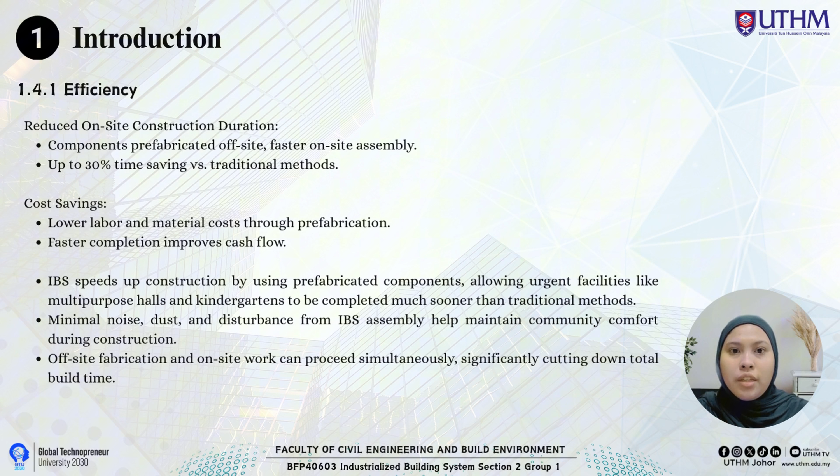The next part is community needs. First, IBS speeds up construction by using prefabricated components, allowing urgent facilities like the multipurpose hall and kindergarten to be completed much sooner than traditional methods. Minimal noise, dust and disturbance from IBS assembly help maintain community comfort during construction. Lastly, off-site fabrication and on-site work can proceed simultaneously, significantly cutting down total build time.

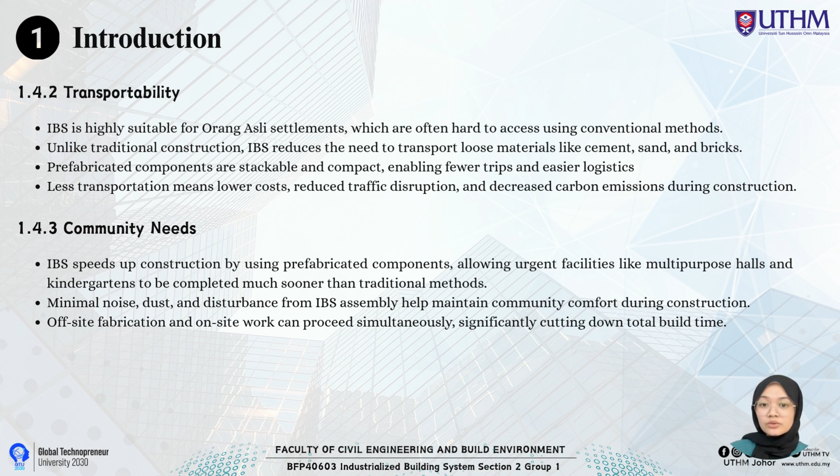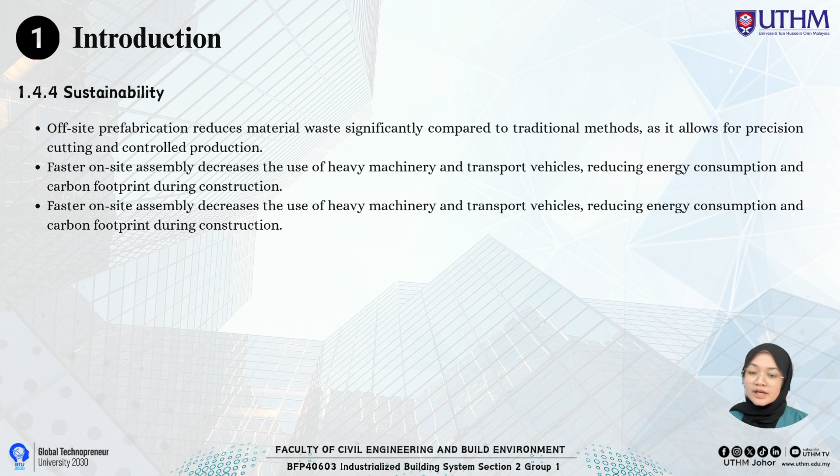Next is sustainability. Off-site prefabrication reduces material waste significantly compared to traditional methods, as it allows for precision cutting and controlled production. Faster on-site assembly decreases the use of heavy machinery and transport vehicles, reducing energy consumption and carbon footprint during construction. Hi, my name is Elvin.

Next will be the 2D layout drawing, which is a site layout plan. You can see that the site location is at Kampung Orang Asli Pos Legap, Sungai Siput, Perak.

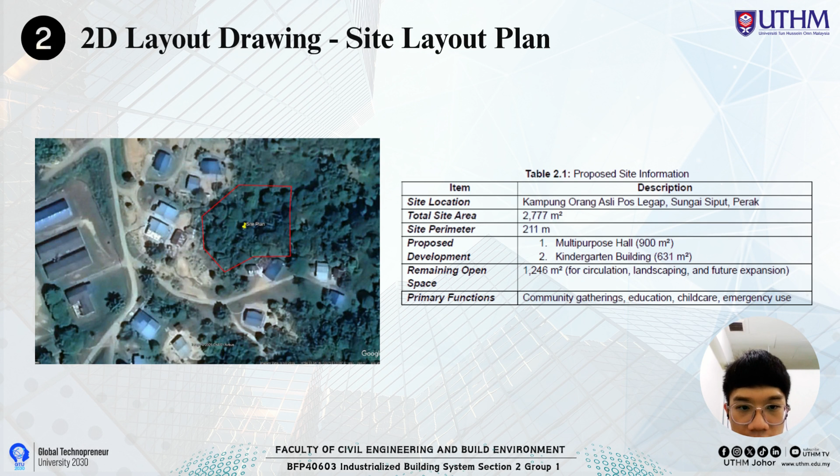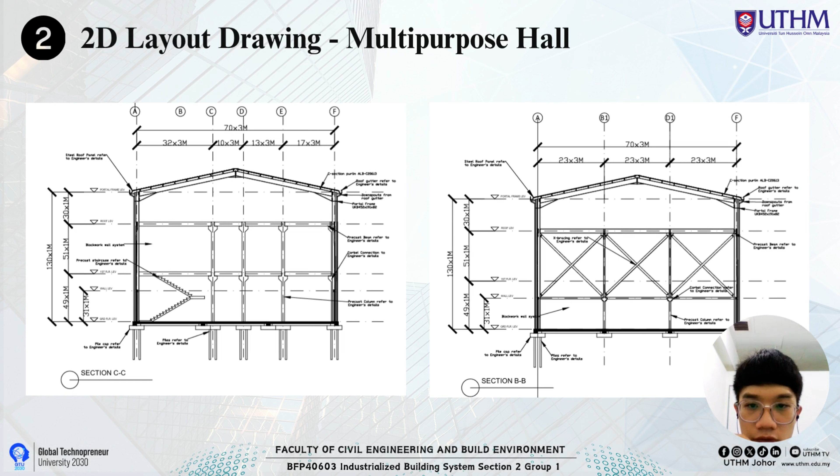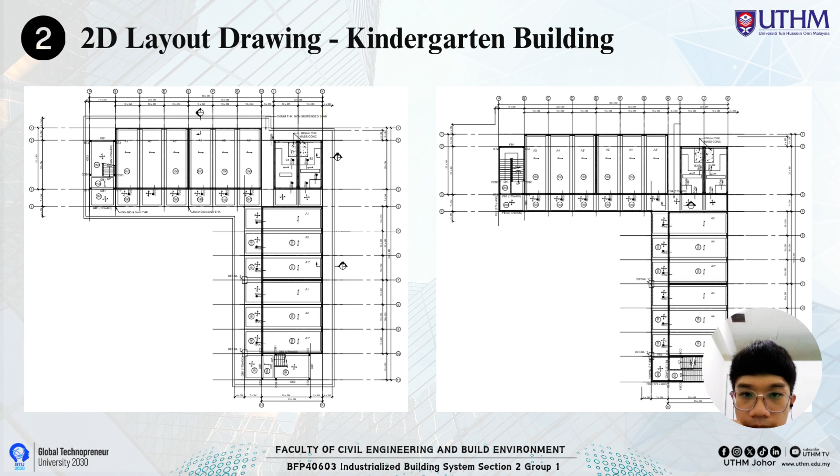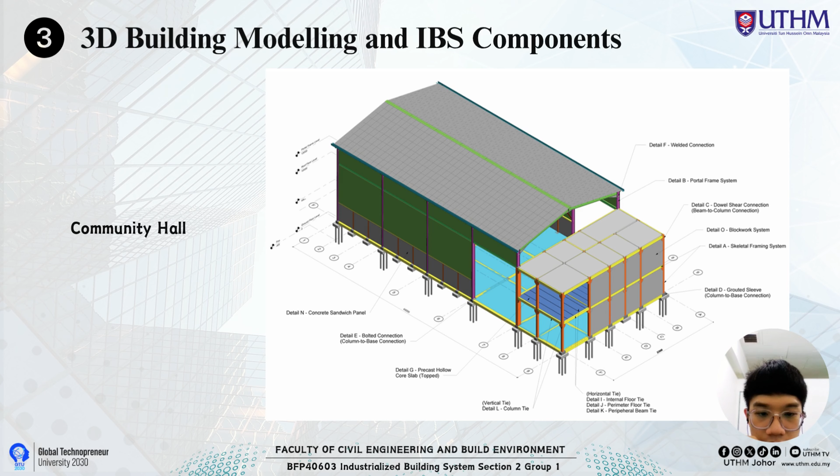So for the IBS component, firstly will be the frame system. Detail A is the skeletal frame system. This system comprises modular components such as precast columns, beams, staircases, and walls. This is applicable to both the multipurpose hall and kindergarten buildings.

For detail B is the portal frame system. This system utilizes large precast and steel assembled columns and rafters rigidly connected to form a moment resisting joint capable of spanning wide distances without intermediary support. This is applicable to the multipurpose hall.

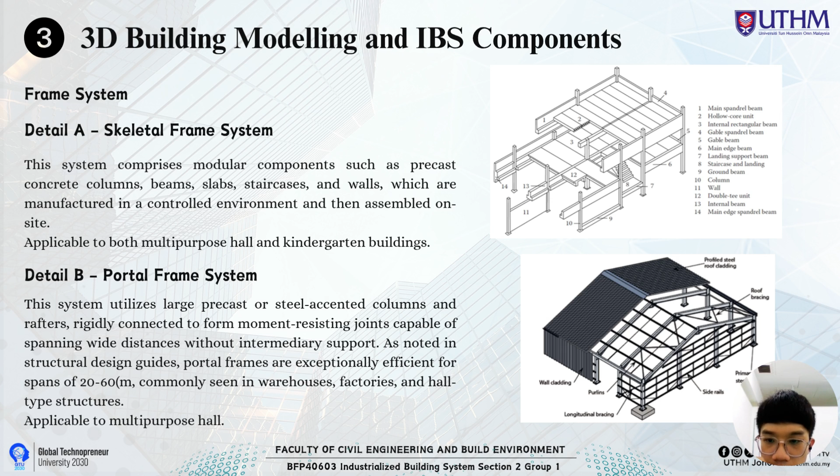Now I will explain about the connection system. The first one is detail C, which is dowel shear connection, beam to column. This detail efficiently transfers vertical and horizontal load between precast components. The components are: first, threaded steel bar, transfers shear force horizontally. Second, corbel, acts as a short cantilever to support vertical loads.

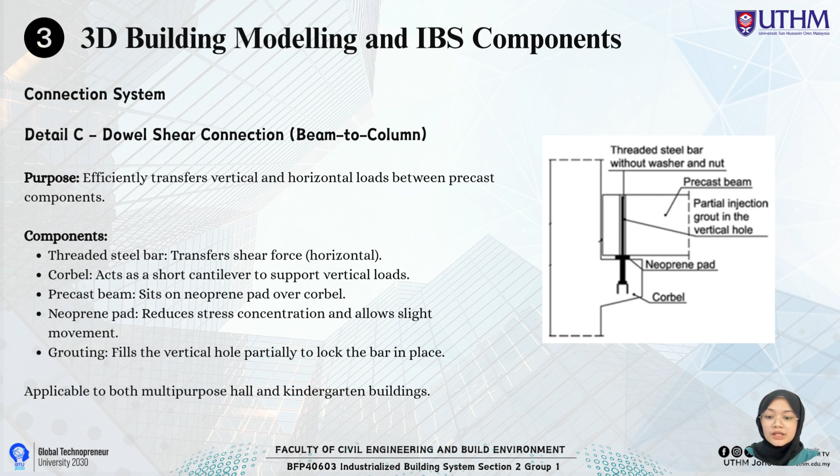Third is precast beam, sits on neoprene pad over corbel. Fourth is neoprene pad, reduces stress concentration and allows slight movement. Last is grouting, fills the vertical hole partially to lock the bar in place. This detail is applicable to both the multipurpose hall and kindergarten building. Second, for the connection system, is detail D, which is grouted sleeve column to base.

The key concept is the first one, grouted sleeve: join precast columns by inserting rebar into a steel sleeve filled with high strength grout. The second one is load transfer: it efficiently handles axial, shear and bending forces. For the features shown in the figure, picture A is a schematic showing rebar inserted into the sleeve with grouting and overflow holes for complete bonding. Picture B is a site image, a real life view of the grouted sleeve connection during rebar installation. This detail is applicable to both the multipurpose hall and kindergarten buildings.

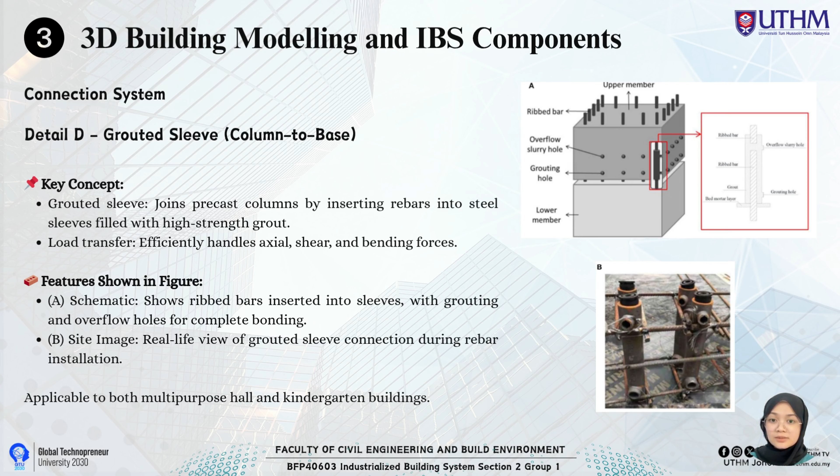Third one is detail E, which is the bolted connection, connecting column to base. The key features: the steel base plate is connected to the column end and anchored to the concrete foundation using bolts. It transfers axial load, shear force, and bending moment into the ground safely, and provides a rigid and stable support for vertical and lateral loads.

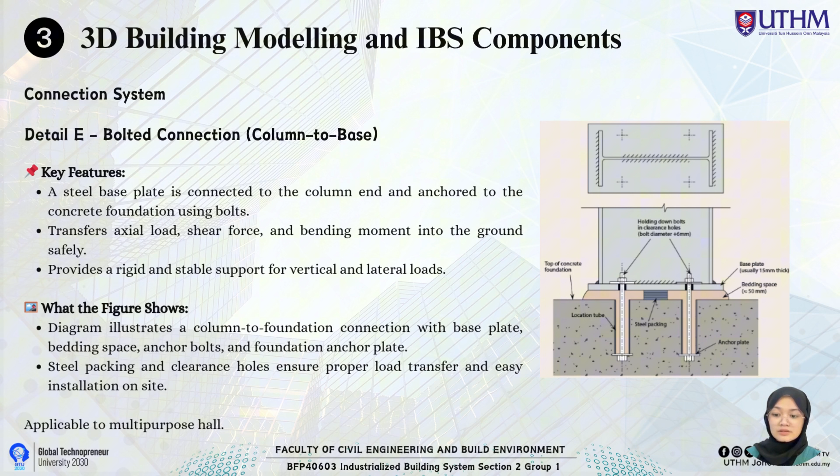The figure shows a diagram illustrating a column to foundation connection with base plate, bedding space, anchor bolts, and foundation anchor plate. Steel packing and clearance holes ensure proper load transfer and easy installation on site. This one is applicable to the multi-purpose hall.

The last one for the connection system is detail F, which is the welded connection, a general connection for steel. What is welding? A common method to join steel components by melting and fusing metals. Used in fabrication shops and on construction sites. It creates rigid monolithic joints with strong continuity. Application in construction: essential in steel building frameworks and bridge construction. It ensures high structural integrity and efficient load transfer. And last one, suitable for permanent connections that require strength and durability. This one is applicable to the multi-purpose hall.

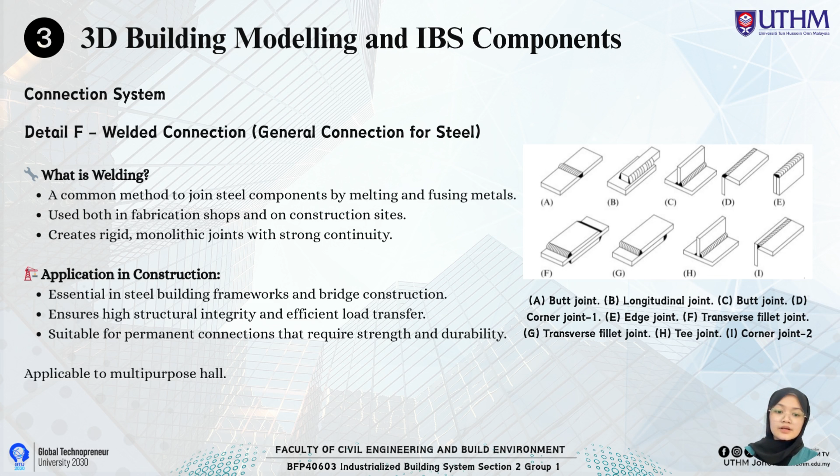For the picture, A is a butt joint, B is a longitudinal joint, C is a butt joint, D is corner joint 1, E is an edge joint, F is a transverse fillet joint, G is a transverse fillet joint, H is a tee joint, and the last one, I, is corner joint 2.

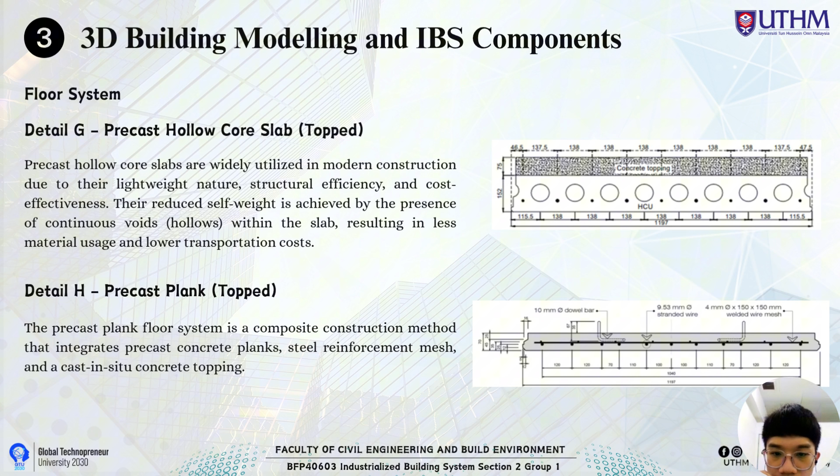So next will be the floor system. There are two types of slab that will be used in both the multipurpose hall and the kindergarten building. Detail G is the precast hollow core slab. These hollow core slabs are widely utilized in modern construction due to their lightweight nature, structural efficiency, and cost effectiveness. And detail H is the precast plank. The precast plank floor system is a composite construction method that integrates precast concrete planks, steel reinforcement mesh, and cast in situ concrete topping.

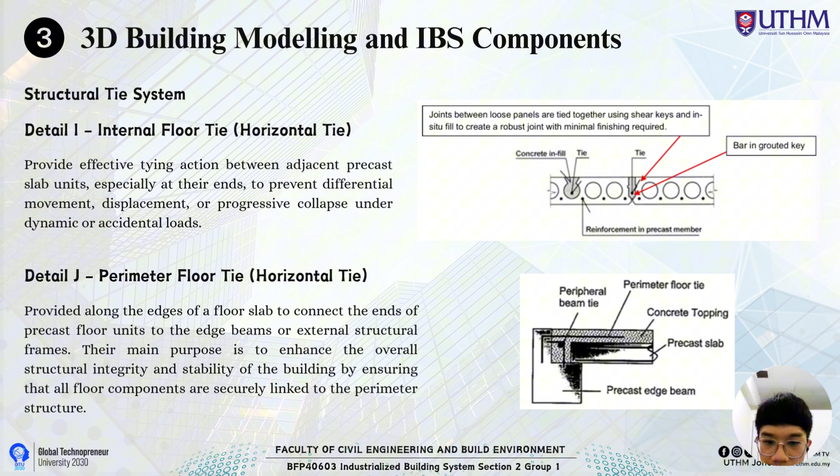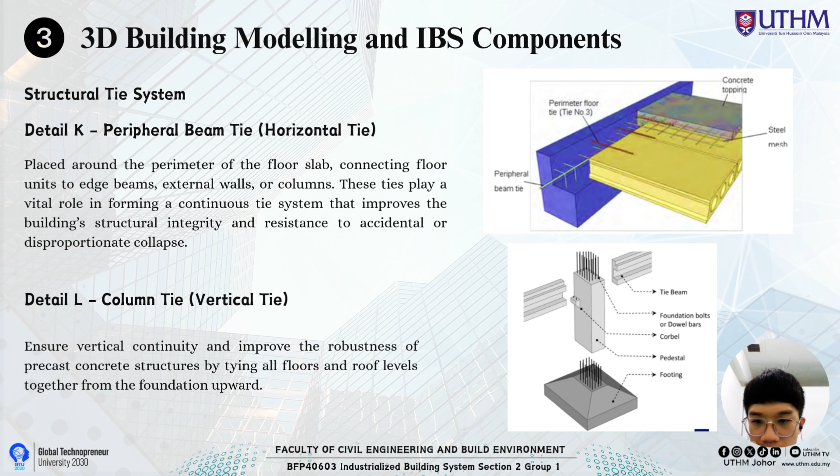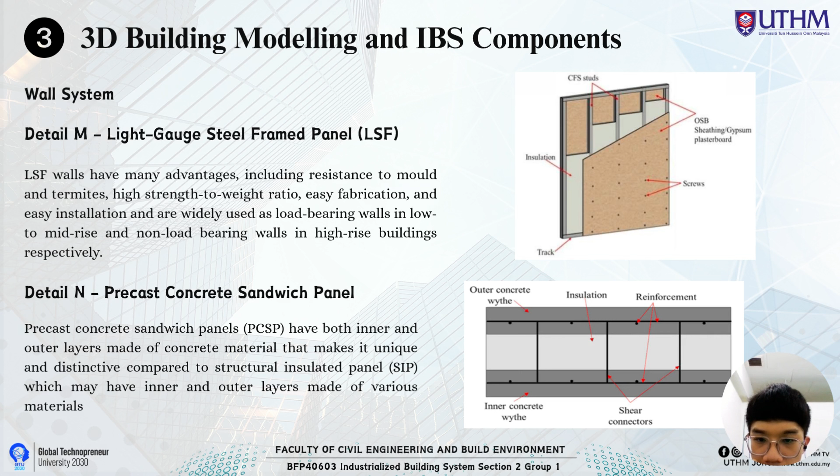These are the wall systems used. Detail M is the light gauge steel frame panel, LSF. It has many advantages, including resistance to mold and termites, high strength to weight ratio, easy fabrication, and easy installation. Detail N is the precast concrete sandwich panel. It has both inner and outer layers made of concrete, which makes it unique and distinctive compared to structural insulated panels. Detail O is the blockwork system. It's a versatile method of construction that involves the use of concrete blocks, clay blocks, and lightweight blocks.

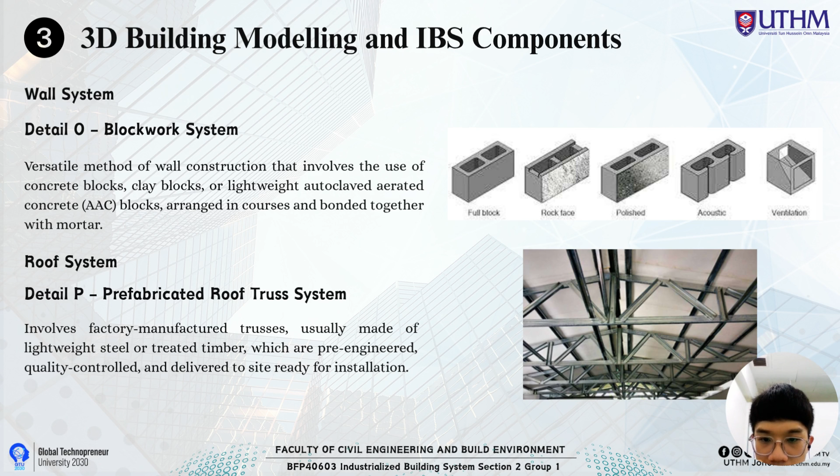Next will be the roof system. Lastly, detail P is the prefabricated roof truss system, which involves factory manufactured trusses, usually made of lightweight steel or treated timber, which are pre-engineered, quality controlled, and delivered to site ready for installation.

My name is Kobe Kwa. I will present Chapter 4, IBS score calculation. The IBS score consists of 3 parts: Part 1, structural system; Part 2, wall system; and Part 3, simplified construction solution. 4.1, IBS score of the multi-purpose hall. For the structural system, we use precast column, beam, and slab. We use cast in situ with reusable formwork for the slab near the staircase. For the roof, we use prefabricated steel. The total score for Part 1 is 48.78%.

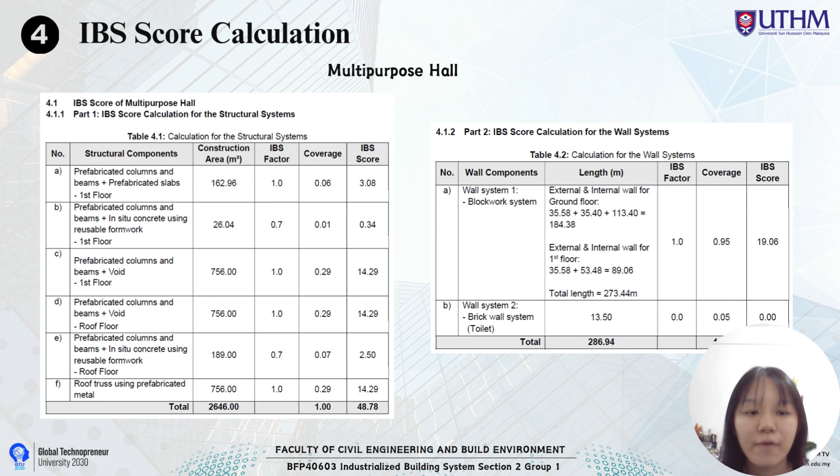For the wall system, we use the blockwork system for all walls except a brick wall system at the toilet, and the total score for Part 2 is 19.06. For Part 3, we select standardized components that are aligned with IBS requirements. Therefore, for this part we got the maximum score of 16 points.

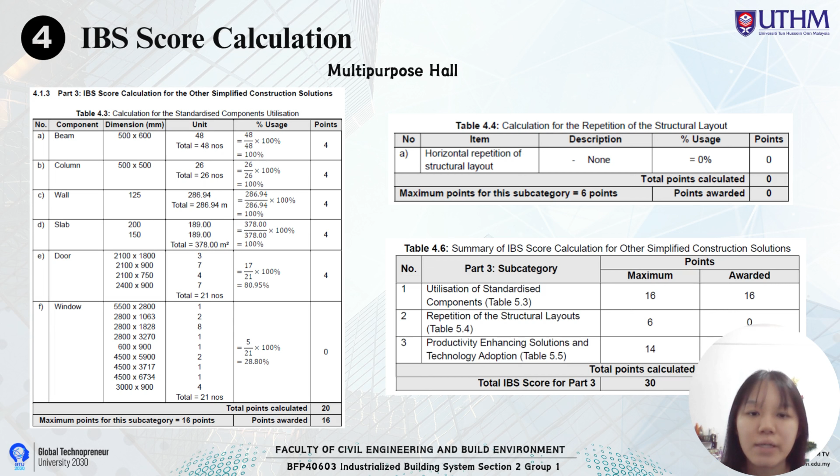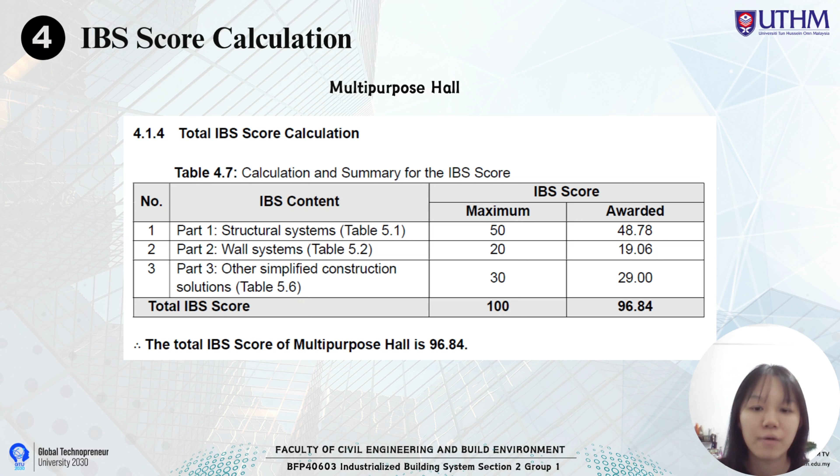The multi-purpose hall has no repetition horizontally or vertically. Hence, there is no score for repetition of structural layout. For productivity enhancing solution and technology adoption, the score recorded is 13 points. Total score for Part 3 is 29%. By summing up the Part 1, Part 2, and Part 3 scores for the multipurpose hall, the total IBS score for the multipurpose hall is 96.84%.

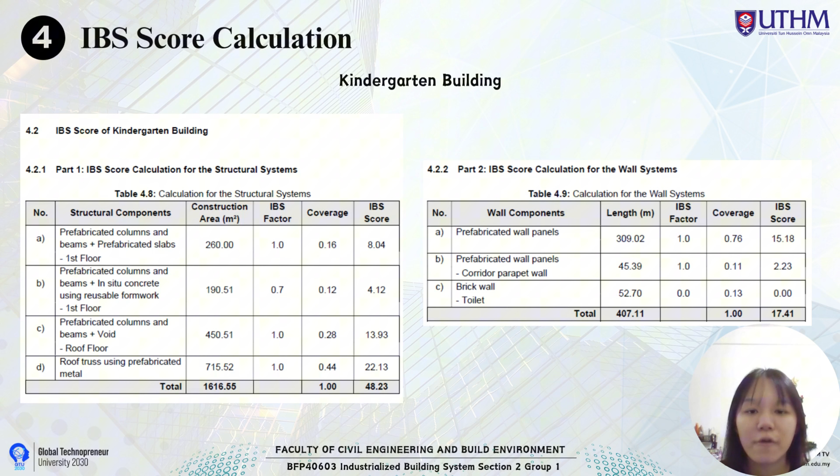4.2, IBS score of kindergarten building. For structural system, we use precast column, beam, and slab. For B, we use cast in situ using reusable formwork for the slab near the staircase. For roof, we use prefabricated steel. The total score of Part 1 is 48.23%. For wall system, we use prefabricated wall panels for all walls except brick wall system at the toilet. The total score of Part 2 is 17.41%.

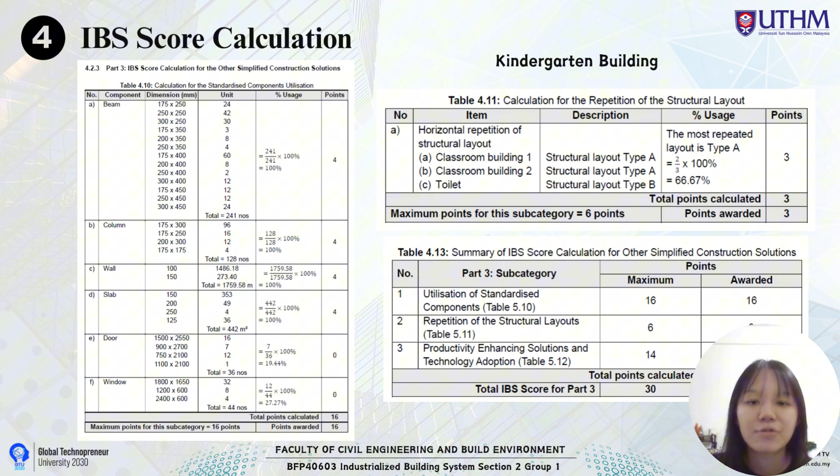For Part 3, standardized components utilization, the kindergarten building scores 16 points, and this building has horizontal repetition of structural layout, that is 66.67%, hence it has scored 3 points. For productivity enhancing solution and technology adoption, the score recorded is 14 points. The total score for Part 3 is 30%. By totalling up the scores recorded in Part 1, Part 2, and Part 3, the kindergarten building has a total IBS score of 95.64%.

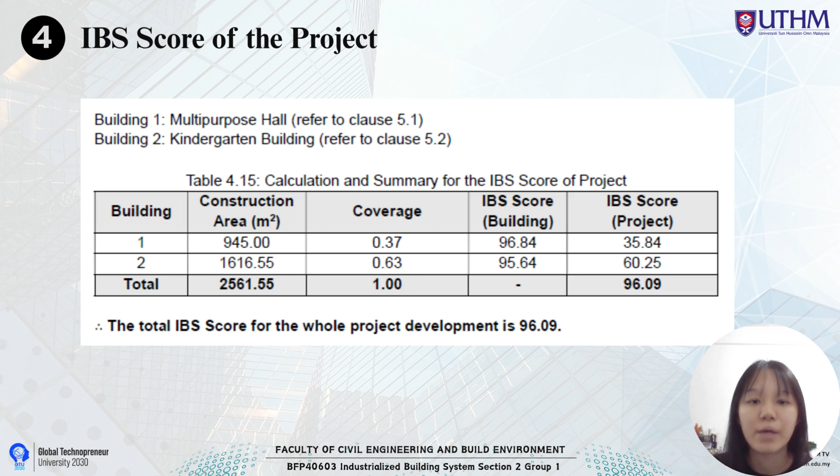IBS score of the project. The IBS score of the project is calculated based on the coverage and also the IBS score of each building. So for building 1, multi-purpose hall, the IBS score recorded is 35.84%, and for building 2, kindergarten building, 60.25%. Summing up these two values, we get the IBS score of the project, 96.09%.

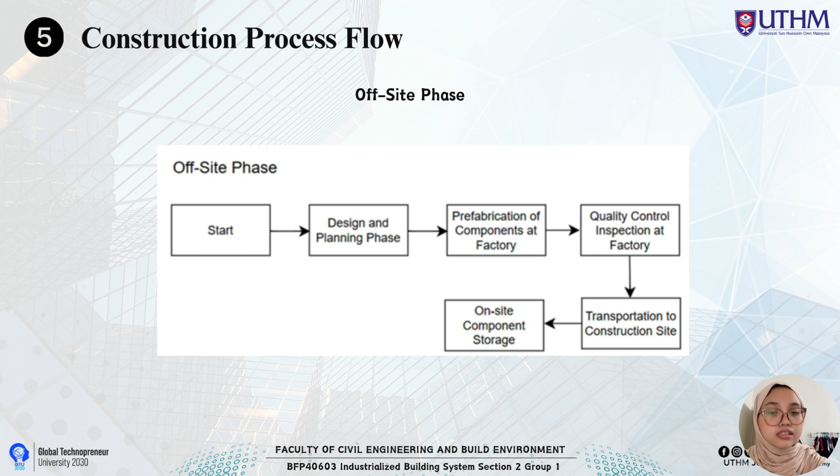So today I'm going to discuss the Industrialized Building System IBS construction process, starting with the offsite phase. This phase begins with the design and planning, followed by the prefabrication of components at the factory. Quality control inspection at the factory is very important, which leads to the transportation to the construction site and on-site component storage. For the on-site phase, the process begins with site preparation and foundation works. Next is the installation of structural components, then wall panels and roofing. This is followed by mechanical, electrical and plumbing integration and finishing works. The phase concludes with the final inspection and handover.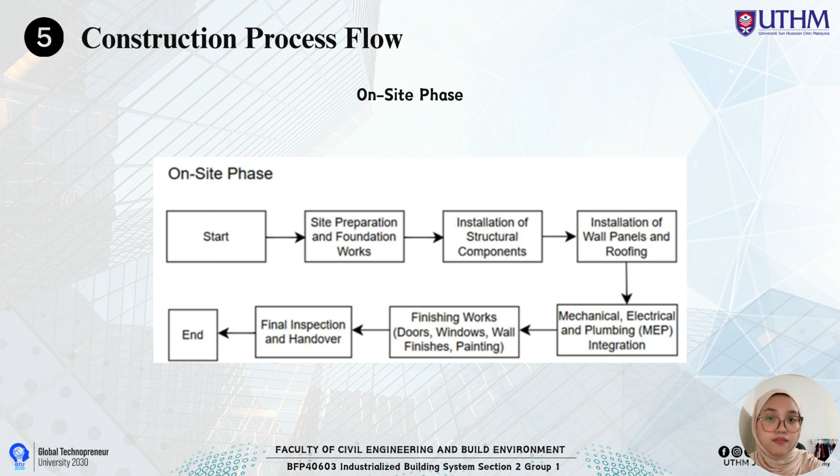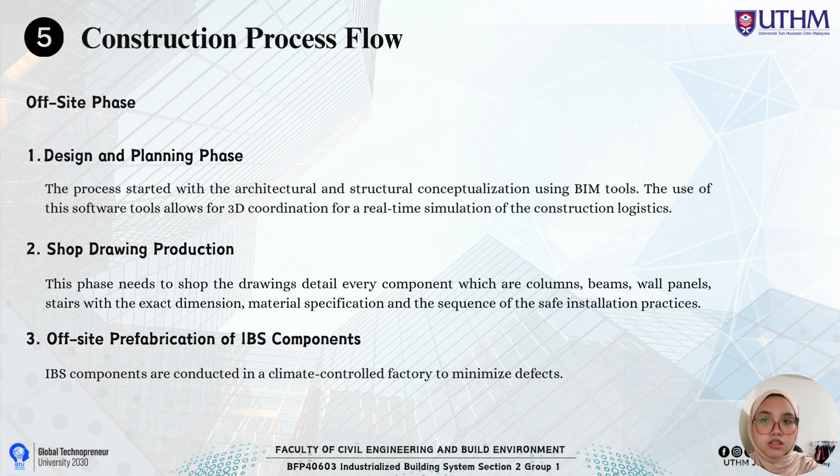Let's go detail by detail for the off-site phase. First is the design and planning phase. The process starts with architectural and structural conceptualization using BIM tools. The second one is shop drawing production, where the shop drawings need to detail every component, such as columns, beams, wall panels and stairs, with exact dimensions and material specifications. Next is off-site prefabrication of IBS components, conducted in a climate-controlled factory to minimize defects.

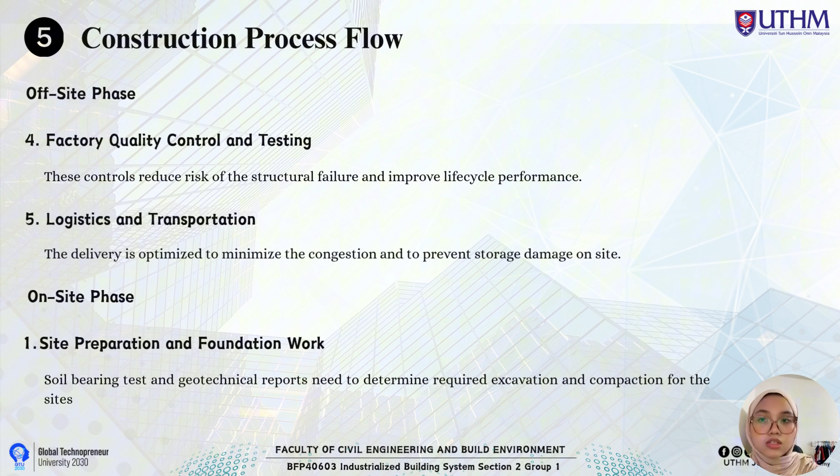Next in the off-site phase is factory quality control and testing, which reduces risk of structural failure and improves life cycle performance. Next is logistics and transportation, where delivery is optimized to minimize congestion and prevent storage damage. Moving to the on-site phase, first is site preparation and foundation work, which needs soil bearing tests and geotechnical reports to determine the required excavation and compaction of the site. The second is on-site storage and handling of prefabricated elements: when delivery happens, IBS components are sorted by type of element and labeled clearly.

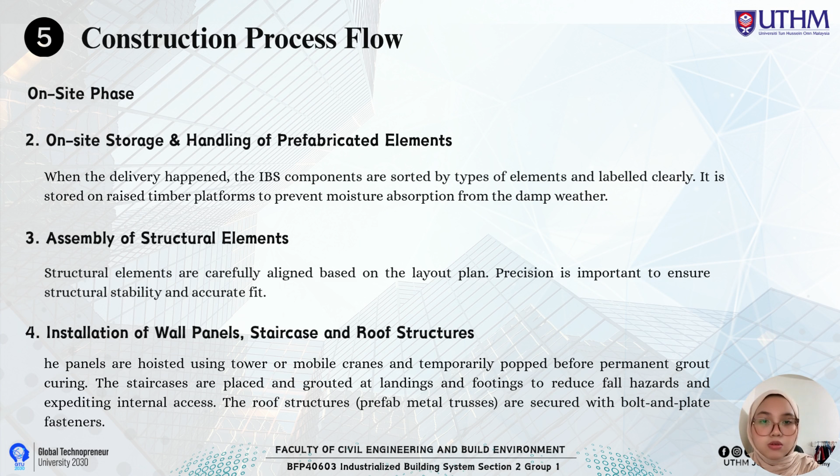Next is the assembly of structural components, where structural elements are carefully aligned based on the layout plan. Precision is very important to ensure structural stability. Next is installation of wall panels, staircase and roof structures, as the panels are hoisted using tower or mobile cranes to install the prefabricated elements. The fifth step is installation of the MEP system using precast modules. Precast IBS elements reduce on-site coordination time, resulting in fewer installation errors and higher fire safety compliance based on CIDB.

The sixth is internal and external finishing works, where external skim coating, waterproof paint and grouting of joints are performed at the construction site. The final step that concludes the construction process flow is final inspection, testing and handover. The final inspection covers load testing and structural soundness, MEP operation such as water pressure and electrical grounding, and fire exit checks and accessibility audits. That's all from me for the construction process flow for the off-site and on-site phases.

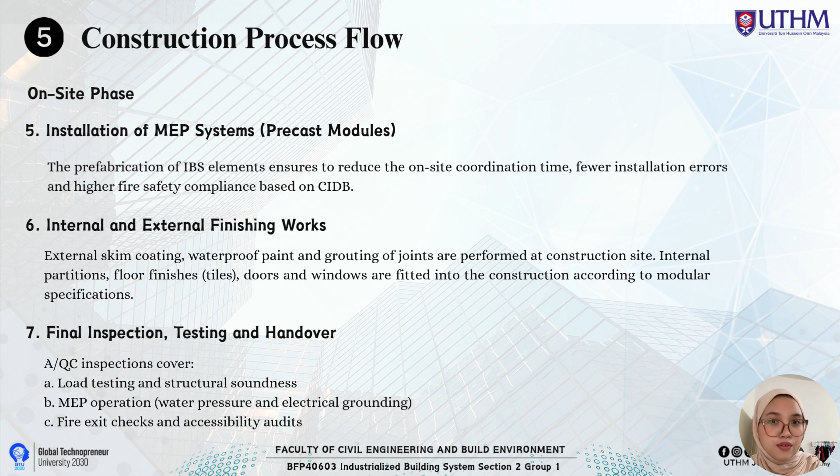Thank you very much. In conclusion, our project aims to uplift the Orang Asli community by providing vital infrastructure through modern construction solutions. With IBS, we can overcome location-based challenges, deliver quicker results, and maintain quality and sustainability. We hope this proposal highlights how engineering solutions can drive social development even in the most remote areas.